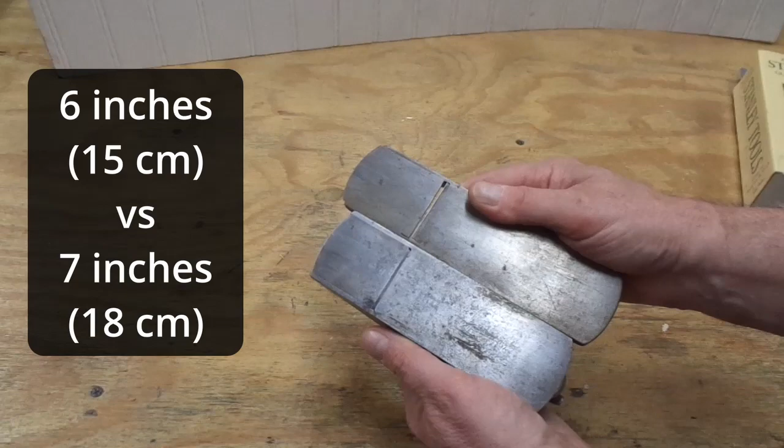The topic of this video, this guy is a number 15. The difference between the number 15 and the 9.5 is that the 15 is longer. If I hold these two next to each other, you can see that the 15 here in my right hand is about an inch longer than the 9.5. Other than that, they're, for all intents and purposes, the same plane.

And I did a video a while ago on this number 9.5 - it's actually a 9 3/4 because it has the tail knob, but this is the Stanley Type 1. To put it in order, here you have the Type 1, this I believe is a Type 9, and I believe this guy here is a Type 18.

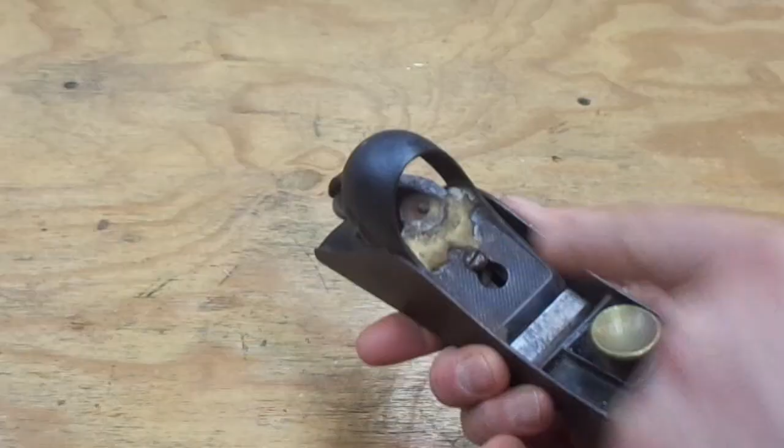So the overall condition of this guy is a bit of a mixed bag. You can see there was a rather obvious repair of the lever cap that had undoubtedly broken, and I would not put that in the category of the best job I've ever seen, but a lot better than I could do because I don't do that kind of work.

Each of the four corners has a different profile on it, so I think this is the only one back here that has not chipped. This one over here has a little nick taken out of it. That one has a pretty good bite out of it, and the back corner here, a little chip.

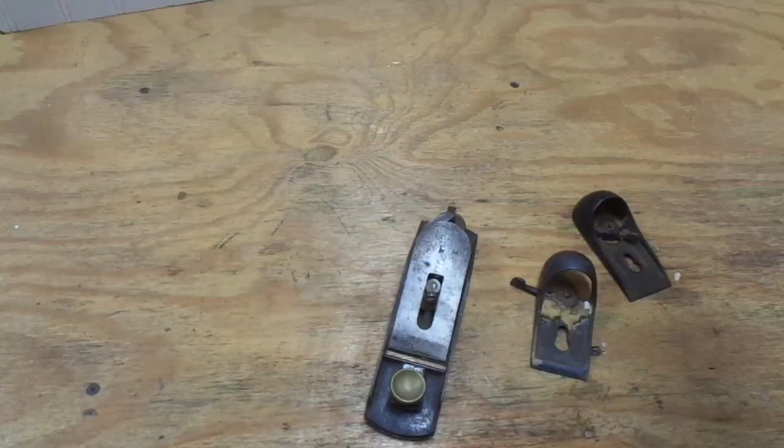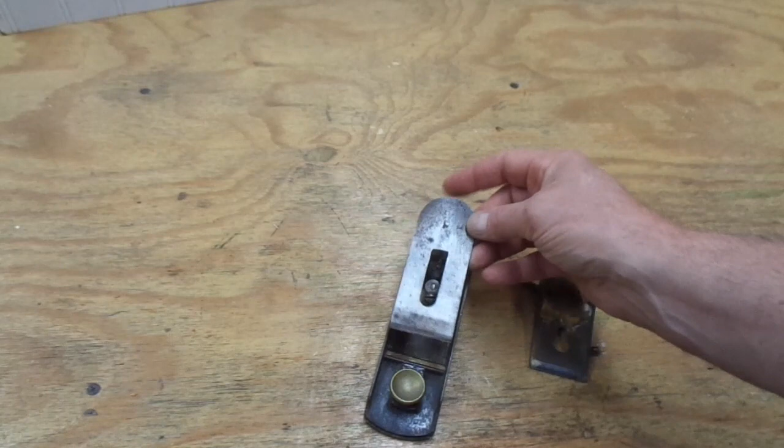However, my best guess is that this was a reasonably well cared for but also well used plane, because this is a replacement iron, and I believe starting with the Type 8s they had the rounded heel on the iron. When they were older they had this more rectangular, angular heel to the iron, which would dig into the palm of your hand.

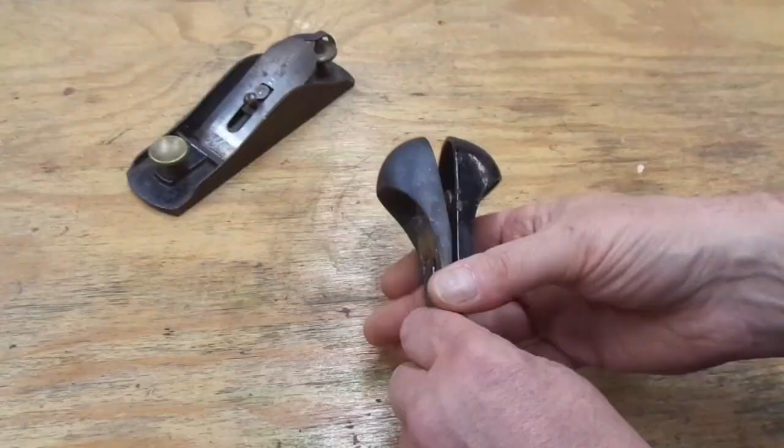And the reason why this flares up is to give room for the cam lever. The cam lever on these older ones swings from the back. You can see there has to be room for that to swing left to right. Obviously Stanley abandoned that idea just a few years later and went with the lever that was on the top side of the lever cap.

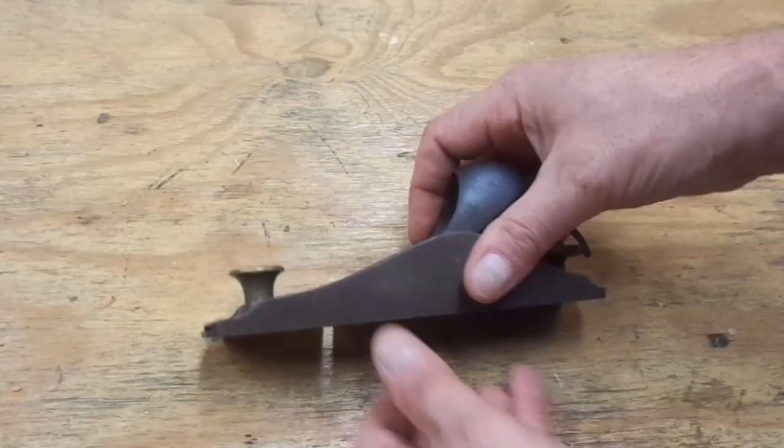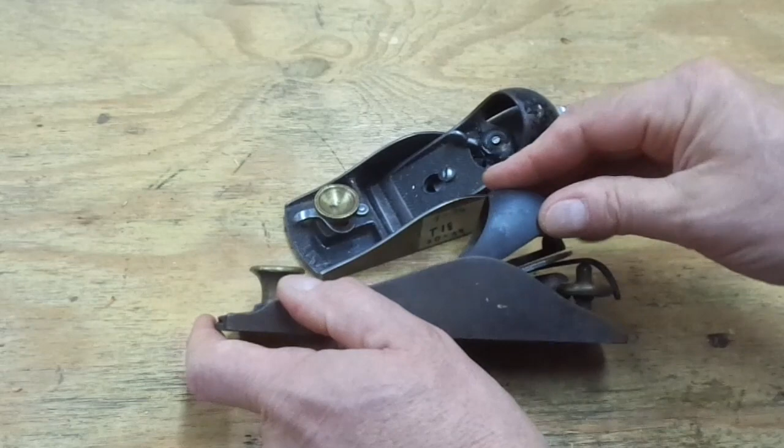I do believe this was undoubtedly japanned, and the brazing process to repair it probably got rid of all that. And what that means, if you view the plane on the side, again compared to a modern one, you can see this lever cap sticks up a little higher. It might be a little more comfortable for your palm, but I suspect it may have made this more prone to breakage.

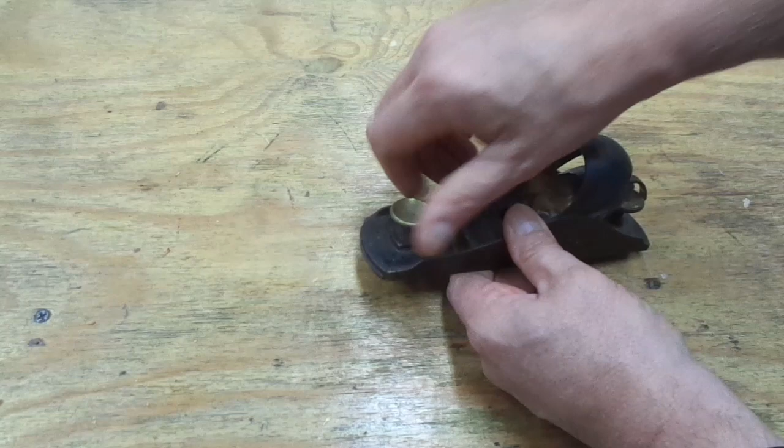To adjust the throat opening, there's just a knob here that you loosen, and then the throat can be slid back and forth. The eccentric lever, which Stanley made a ton of these, didn't come out until Type 10, just a few years after this one.

And this knob is in good shape, looks to be solid brass. And the throat plate here, if I take it out, looks like so. You can see there's some wood shavings in there in very good shape. This particular throat plate, according to the type study, was the third iteration of it. Not very big changes, but mostly the supporting casting changed a little bit as the plane evolved.

The lateral adjust lever here, I believe, showed up in type 8A just a few years before this type, and this is the second iteration.

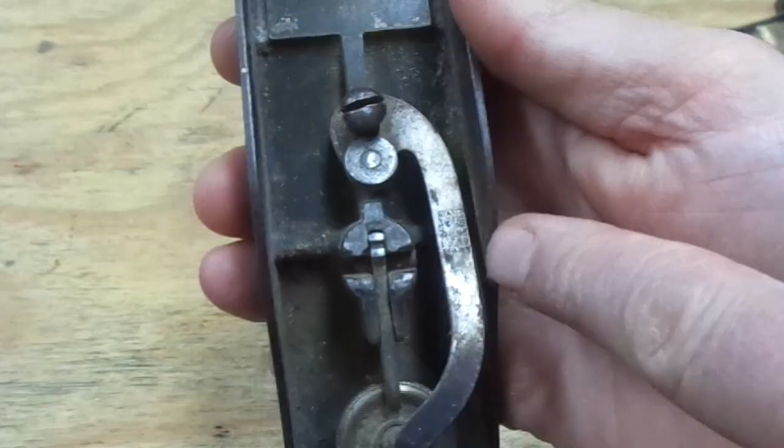There's actually 4 patent dates down there. The dates are 2/8/76, and of course that's 1876, 10/21/84, 1/17/88, and 7/24/88. Okay, let's take a couple minutes to talk quickly about these 4 patents.

Here's the first one. It's dated February 8th, 1876. And I'm not going to spend a lot of time reading the text. I'm just going to give a quick overview.

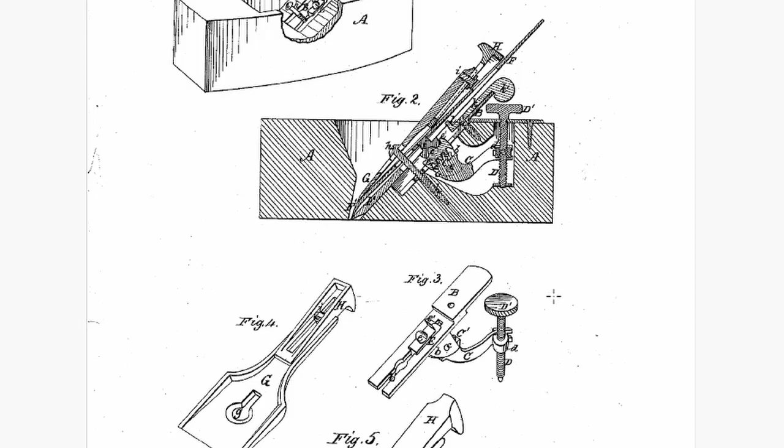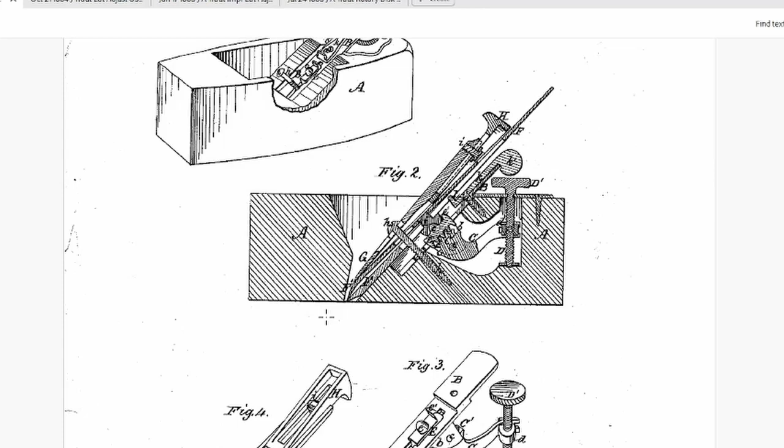You can see by these diagrams, figure 2 and figure 3 here, the essence of this patent is a depth adjustment mechanism by using a turning wheel similar to a screw. And this patent is by a man named Joseph Nicht, and he came up apparently with the first idea to patent it about having a screw mechanism in the body of a plane that had a nut on it attached to the screw, and as you dialed the screw clockwise, counterclockwise, the nut would ride on it up and down, and that nut here was attached to a lever. And this lever in the diagram seems to have been attached to a rack and pinion gear mechanism. So as this nut slides up and down, the iron of the plane will plunge deeper into the wood or will be pulled back.

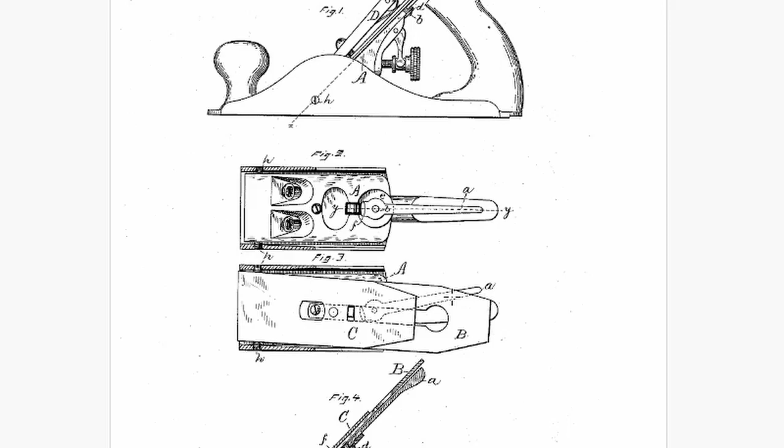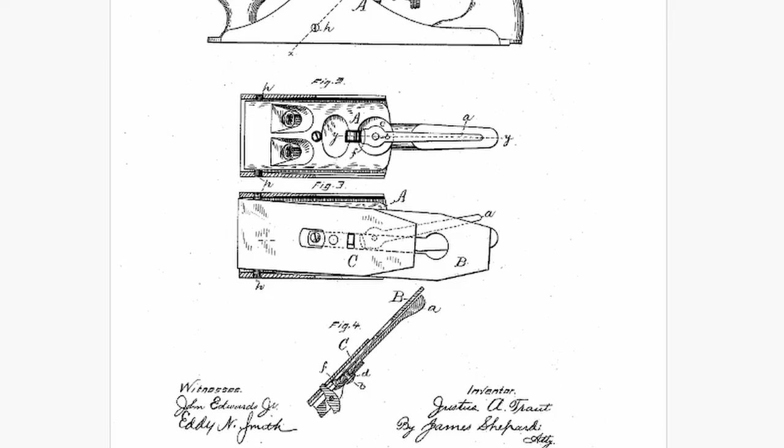The second patent is by Justus Traut, and he had many patents while working for Stanley. This one's dated October 21st, 1884, and the essence of this one is simply a lateral adjust mechanism using a lever, and this looks very similar to what was used on the Type 5 bench planes. You can see the outline of the lever here as you rotate it clockwise, counterclockwise. There's a little tab that sits in a slot on the iron that will cause the iron to rotate clockwise, counterclockwise to adjust the skew of the iron as it interfaces with the wood.

The third patent, this is also a Justus Traut, and this one is dated January 17th, 1888. You can see by this diagram he came up with the idea of a lever that would fit in the tight confines of a block plane. You also have the depth adjustment wheel that rides up and down on the bolt. So this block plane looks an awful lot like the common Stanley block planes that we all know and love. And in this one, instead of having the wheel on it, it has a little tab like the previous patent had described.

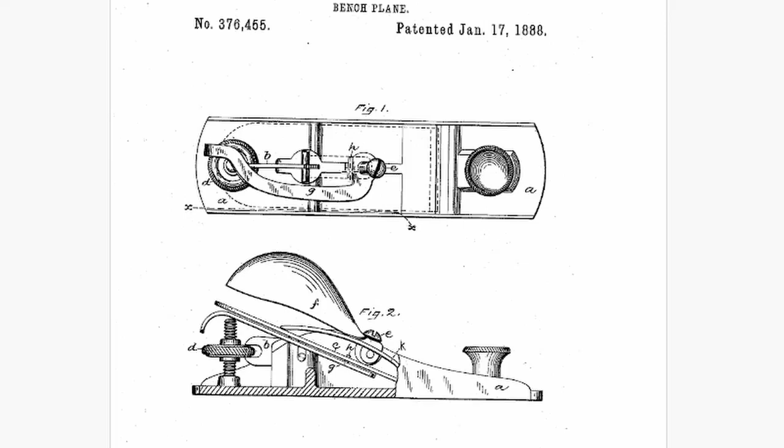And finally, the fourth patent is the disc that goes on the lateral adjust. Here's a diagram again. This is a Justus Traut, dated July 24th, 1888. You have the lateral adjust, but instead of a little tab that goes up into the slot of the iron, this has a wheel. So that's what we got for these. That's what those four patents are all about.

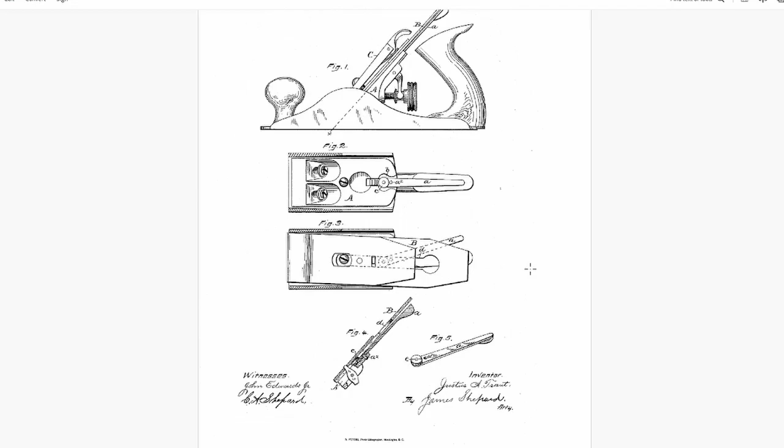According to the type study, this is the second Excelsior body. The only other one I have to show you is on this Type 1, but where this is a 9.5 and this is a 15, it's kind of hard to see because they're different lengths. But I think you can see they are similar, but definitely different shapes.

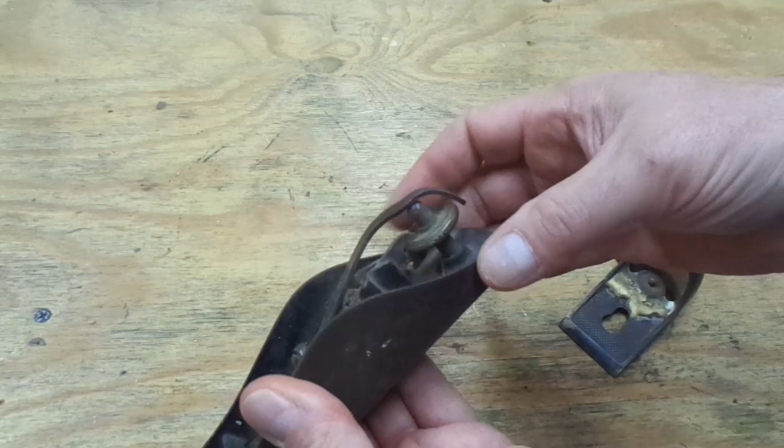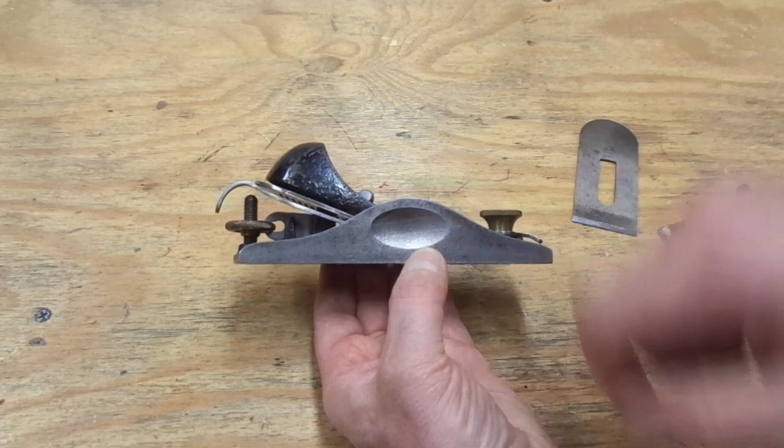And of course, the Excelsior body eventually gave way to the standard block plane body that we all know and love. The depth adjust wheel is right-hand thread. Didn't go to left-hand threads until 1899 in the Type 12 era. And the symmetric body on the block planes was a Type 13 around 1900.

The type study gives some details that I think are a little beyond the scope of this video, but they claim this is the fifth style of body to have evolved through these block planes. Most of the changes, in my opinion, were relatively minor, mostly changing the ribs in here. And recently, to this block plane, a notch had to be cut back here to make room for the lateral adjust lever mechanisms.

As I look at this particular body, you can see evidence of some of the japanning. There's even a little bit of gloss here behind the knob, a little bit on the toe here. I think if I wash this and wax it up, it might actually shine. It's in pretty good shape for a plane this old.

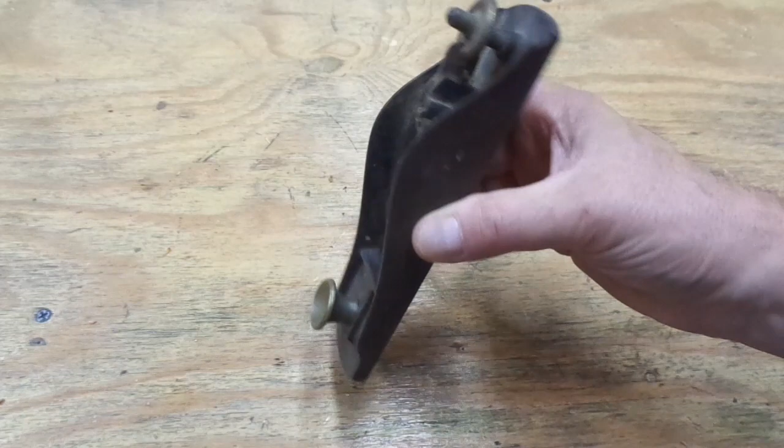I'm a little tickled at how clear these patent numbers are on the lateral adjust lever. This is badly tarnished, but there still has the word Stanley wrapped around here. I think with a little time, elbow grease, and TLC, this will shine up pretty nicely. And the sole actually looks, again, really good shape for a plane this age.

So the iron here has had a little bit of a bite taken out of it because it's been sharpened so many times. It doesn't quite have the length to reach the throat anymore. So somebody took a little bit off back here.

To illustrate that, I have another very worn block plane iron. This has the T trademark on it, and you can see if you put that in, the wheel is bottoming out on the top of the slot. In fact, this one might have been enlarged a little bit as well, but that one doesn't really quite make it either. And I have this other Sweetheart era iron, and you can plainly see quite a difference.

So a new iron would sit about like so, with a good 2/3 of a centimeter, 1/4 inch, 3/8 of an inch of material that could be removed before the iron starts to bottom out.

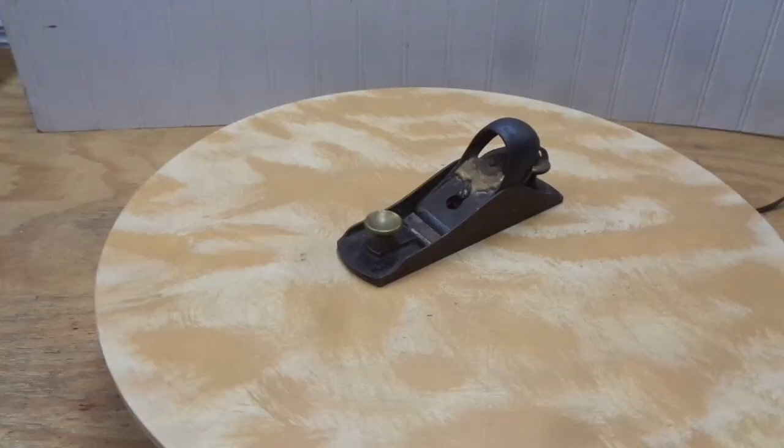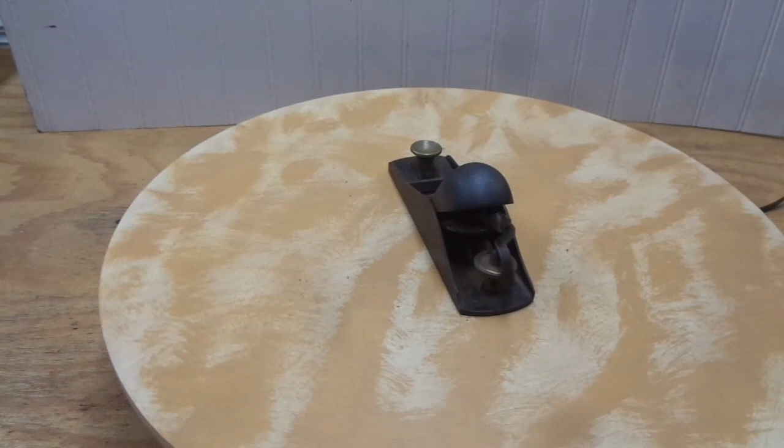I'm not sure what I'm going to do with this guy other than probably clean it up. I might take a little time and look around and see if I can find some period appropriate parts for those that have been badly damaged, particularly the lever cap and possibly a new iron. But time will tell how good that's going to be. I don't think I'm going to turn this into a user. Just don't really need it, and I think it's a little bit too close to a piece of history. I'd rather try to get it restored a little bit, something more appropriate to what it looked like in its former glory.